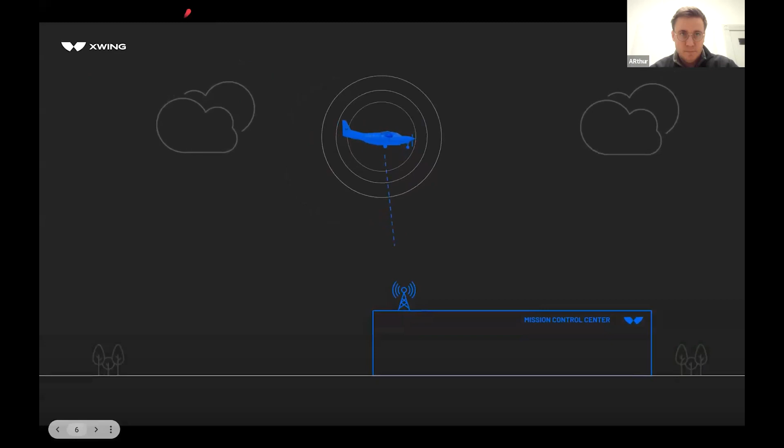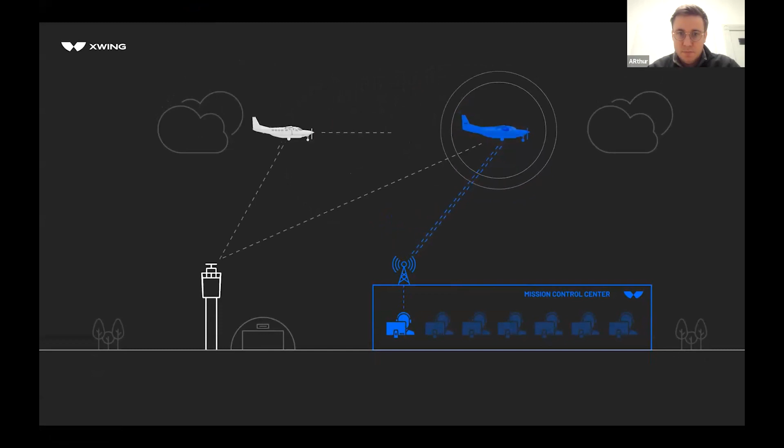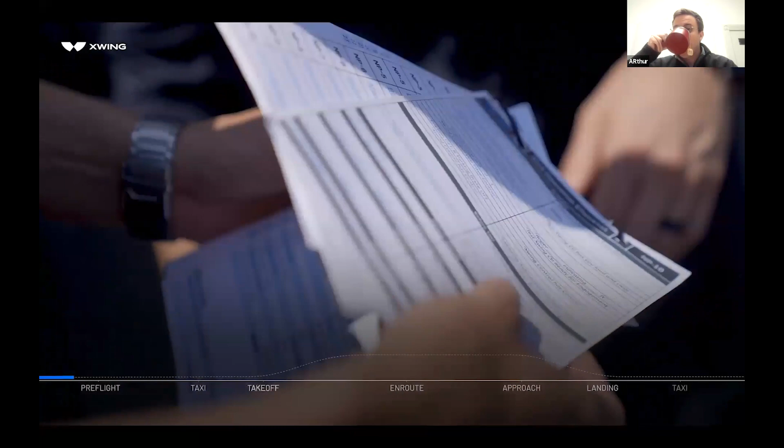Introducing Superpilot, Xwing's autonomous flight system. Xwing's Superpilot system addresses every aspect of the pilot's role. From a mission control center, a remote operator continuously monitors the plane, providing operational control, coordination, and communication. Our uncrewed aircraft seamlessly integrates into the national airspace system. Let's take a closer look at how Superpilot works from gate to gate. Before a flight, the remote operator validates an auto-generated, path-optimized flight plan and submits it to air traffic control for approval. When deployed in commercial cargo service, the same procedures required for a typical crewed Part 135 cargo aircraft are followed and supplemented with additional steps needed to support unique aspects of an uncrewed mission.

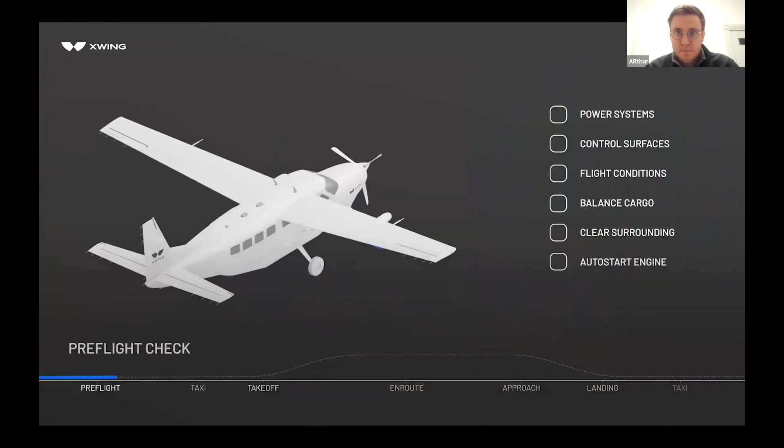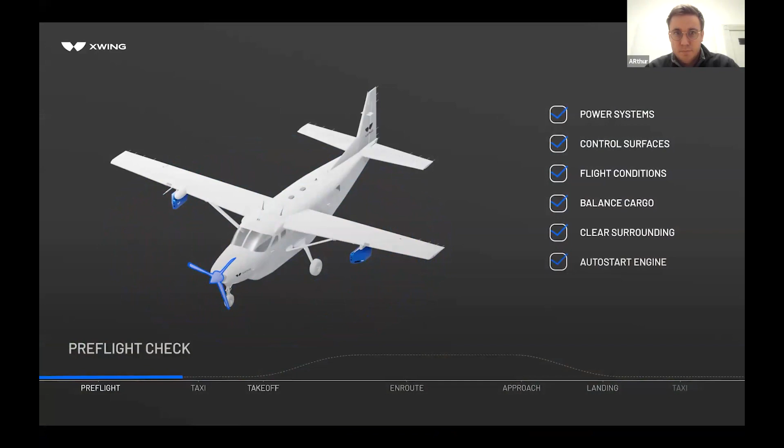Prior to flight, the ground crew inspects the aircraft, initiates the Superpilot system, and loads the cargo. Automated pre-flight checks initiated. Superpilot conducts an automated pre-flight inspection to ensure all systems are functioning properly. The remote operator reviews the weather and obtains clearances from air traffic control. After loading, Superpilot validates weight and balance data. The ground crew secures the aircraft and clears its surroundings. Then the remote operator initiates an autonomous engine start. Once air traffic control provides a taxi route, the remote operator confirms all systems are go and initiates the auto taxi sequence. The aircraft automatically stops at key points along the taxi route, and the remote operator coordinates with ATC before proceeding to the next taxi phase.

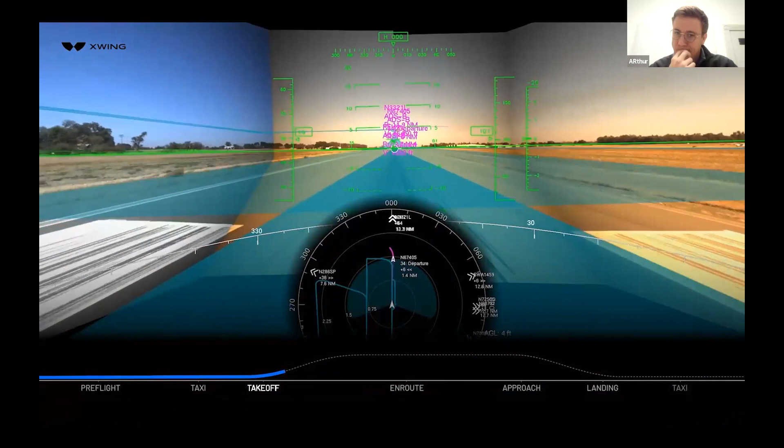Using onboard sensor data, detection algorithms run constantly to allow Superpilot to avoid any potential obstacles. While taxiing, the remote operator listens to ATC instructions and may alter the route as instructed. When cleared by ATC, the remote operator authorizes Superpilot to enter the runway for takeoff. Auto takeoff initiated. Superpilot, under the supervision of the remote operator, monitors system health and performance and its surroundings to ensure a safe departure. Superpilot then executes a takeoff and climb out automatically. While in the air, Superpilot maintains an optimal flight path based on the uplinked mission plan.

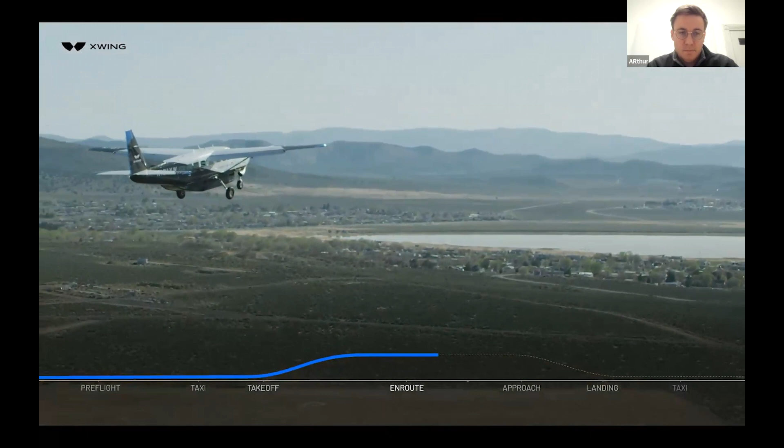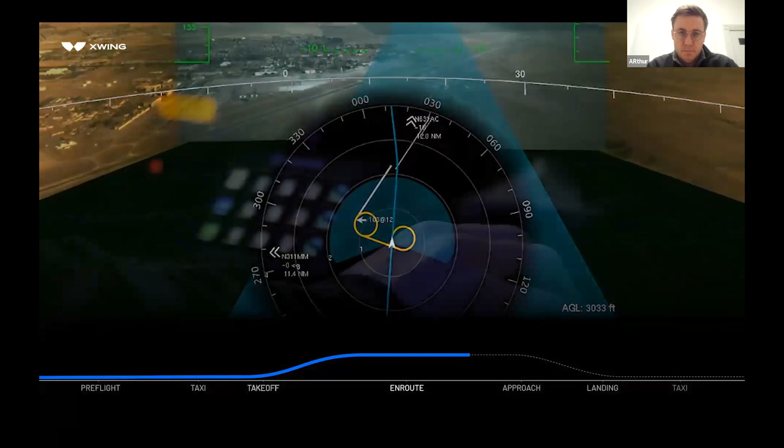Superpilot continuously monitors onboard system health and, if needed, can automatically conduct all the emergency procedures that a human pilot would normally follow. For example, Superpilot continuously monitors and evaluates the glide path from its location to the most optimal landing site from all suitable options. In the case of an emergency, Superpilot will initiate a reroute to this landing site. The remote operator may redirect the aircraft to a different landing site if desired and may communicate with ATC as needed. The Superpilot system also includes an advanced detect and avoid system. By fusing data from multiple sensors, the detect and avoid system monitors other airborne traffic in order to maintain a safe separation. Superpilot has sensors that can see in the dark, in weather, and in sun glare, thereby enhancing flight safety. Traffic conflict anticipated. Superpilot is also capable of autonomously executing an avoidance maneuver.

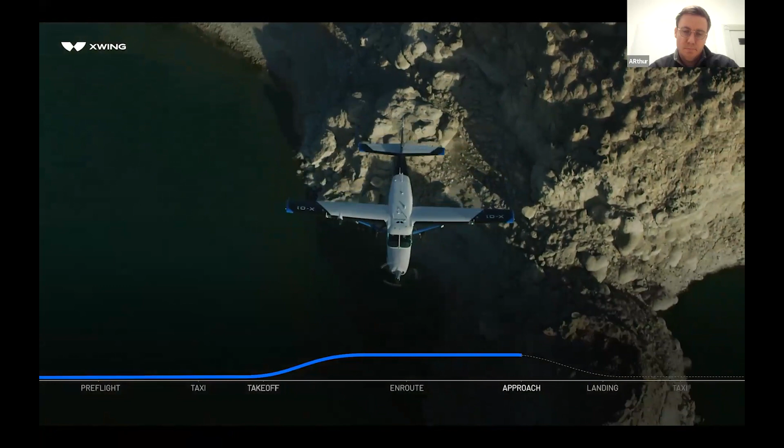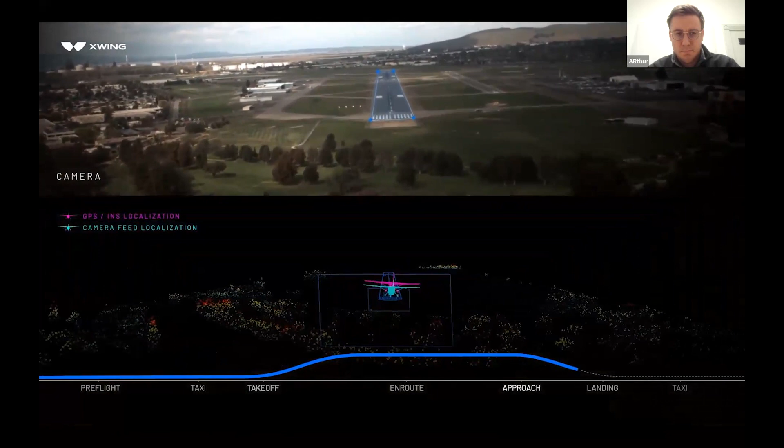Superpilot is able to detect any potential hazards with plenty of time for the remote operator to coordinate an appropriate response with ATC. When the plane begins its destination arrival sequence, Superpilot performs a number of self-checks before landing to ensure that all systems are operational. The remote operator communicates with ATC and receives instructions. Approach procedure updates may be transmitted by the remote operator to modify Superpilot's auto-land sequence. Superpilot maintains the runway centerline using conventional ground and space-based aviation navigational aids. As the aircraft approaches the runway, Superpilot engages onboard visual navigation sensors to identify the runway and continuously evaluate its ability to complete a successful landing.

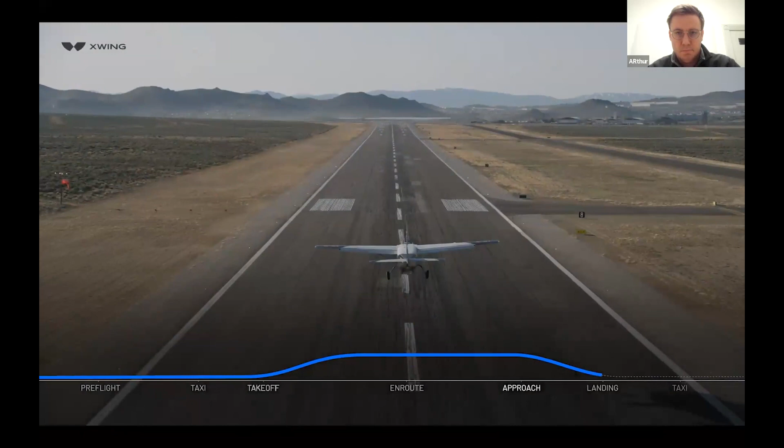Until completion of the landing, Superpilot uses onboard sensors to continuously verify that the runway is free of other aircraft and obstacles and guides the aircraft to touchdown. Just like at takeoff, Superpilot executes the landing and any emergency procedures on its own. After taxiing to its apron, Superpilot shuts the engine down and the ground crew offloads the cargo.

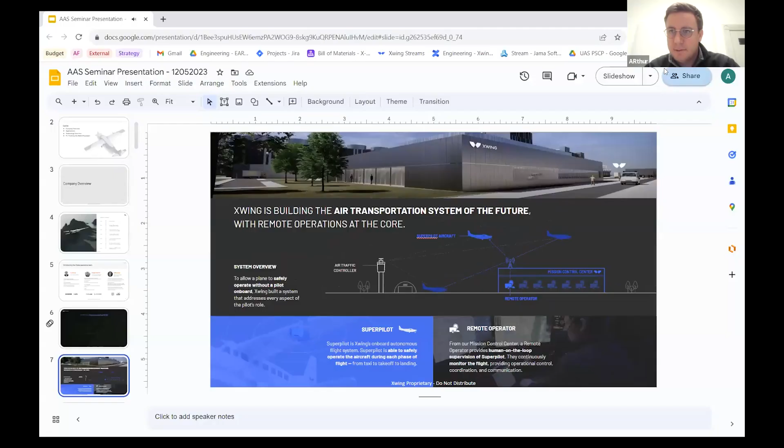Good. Okay, so hopefully that gives people a good overview of what the system does and how it works. I think the general premise of it at a high level is that we're taking the onboard pilot and we're moving them to the ground, and they're becoming a remote operator as shown here. The other consequence is that the remote operator no longer has the ability to actually directly fly the aircraft.

They are able to set the direction for the flights and give kind of high-level commands to the aircraft, but the workload on the pilot is greatly reduced. And because of that, it's very believable to think that one remote operator can now oversee multiple aircraft. The other piece is that in the case where the remote operator is incapacitated for whatever reason, or in the case where the communications link between the aircraft and the ground is inoperative for a while, the aircraft is fully capable of getting itself onto the ground.

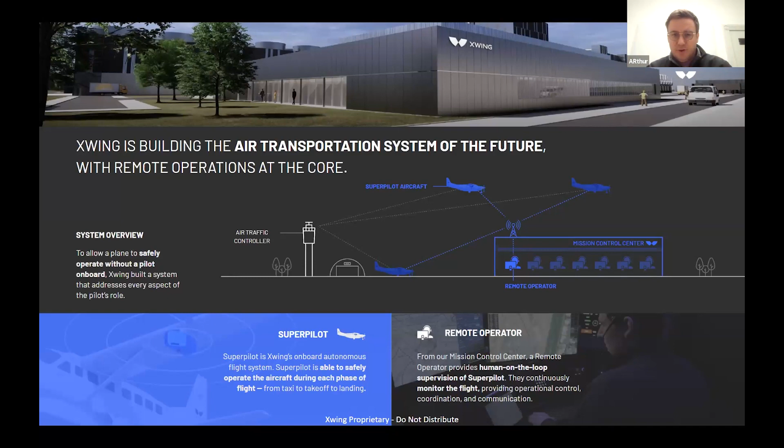But you can imagine now a world in which you have a centralized mission control center where a group of remote pilots oversee a group of autonomous aircraft. And they don't all have to be the same type of aircraft. The same person could oversee a Caravan, an eVTOL aircraft, or another type of vehicle even. And so we're really thinking about our technology as the kind of foundation of a different kind of transportation system that we'll be using in the future.

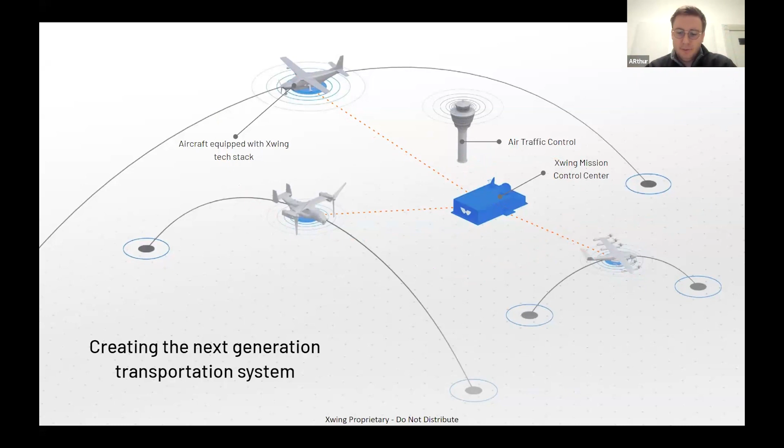Talking a bit about applications, I'm going to spend a tiny bit of time on this. I think at a high level, our technology offers a few advantages. So one is pilot shortage. You guys might know that there's a big problem with pilot shortage in the US, and that's not going to get any better as aviation scales with these new urban air mobility vehicles. These cargo operations of the type that we're flying are the least interesting type of flying for pilots. If you're flying a 787 with a major airline, that's a really cool job. But if you're flying cargo from a small airport to small airports, there's not a lot of pilots who want these jobs. And so there's an even more acute pilot shortage problem there.

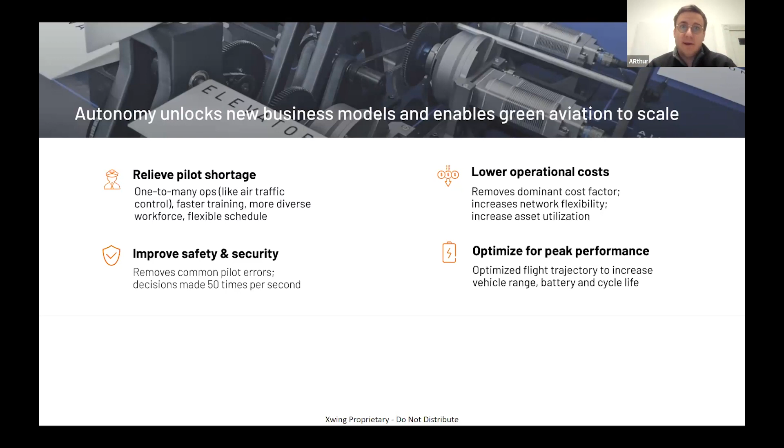The other piece is safety and security. I think a lot of small aircraft accidents come due to pilot errors, and we feel like a system is going to be able to improve on that. Lower operational costs, we'll talk about that in a minute, but effectively you are spreading the pilot across more aircraft, and so the cost is diluted, and the pilot cost in the whole equation really comes down. And then optimization for peak performance, while you're no longer carrying the weight of the human, so you can only carry cargo and really maximize the use of your payload.

Going forward, we're working right now on certifying our technology on a Cessna Caravan. And the clear application is working with cargo operators. So we have an airline that's got about 35 aircraft. FedEx has a much larger one. We work with UPS. There's a lot of these small airlines out in the country flying Caravans, and so that's the first application for us. There are military applications also, mostly in the cargo space. And then there is the advanced air mobility field, which is this up-and-coming new application that we'll talk about just a little bit here. The same technology applies across all these different types of operations and platforms with very little changes, it turns out.

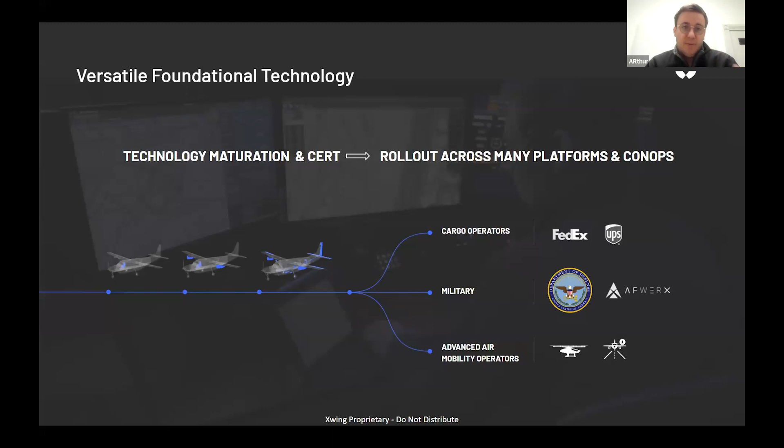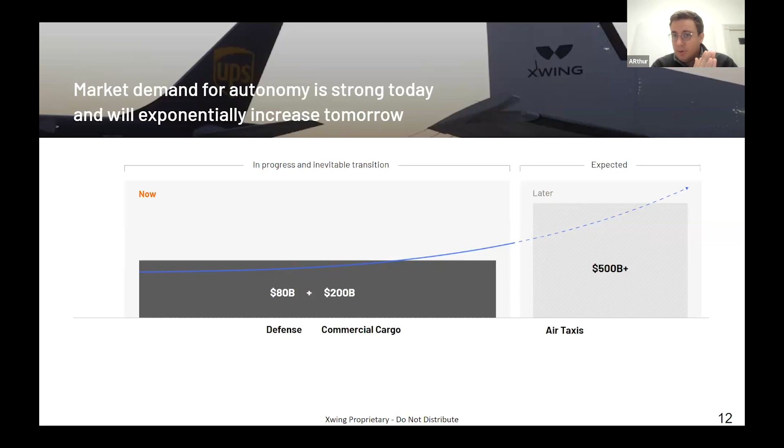Going one level deeper, our thesis is that there's this inevitable transition of cargo, both across commercial and defense, towards autonomy, where there's few reasons why in 10 years or so the majority of cargo aircraft wouldn't be autonomous, specifically the small aircraft. That in itself is already multiple hundreds of billions of dollars. And then beyond that, there is an even bigger potential for air taxis and air mobility in general, which is sort of an unknown at this point. So we're thinking about it, but there's still certainly a lot of questions around how that's going to turn out.

I'll talk briefly on the cargo piece. The way that small aircraft cargo works today, just to give you a sense, is you have a pilot, and they're going to take off in the morning at 7 or whatever. They're going to fly 1 hour. Then they're going to have to wait all day on the clock for cargo to be loaded back into the aircraft. So you have to pay them for a full day of work for what is effectively something like 2 hours of flight a day.

So it's pretty inefficient from the usage of the pilots. And so the premise of autonomy is now the pilot sits in a room, they can pick up a flight from 7 to 8, another one from 8 to 9, 9 to 10, and basically fill their day with actually flying time. And therefore you can dramatically increase the use of the pilot, and that makes your ability to generate margin much higher in a space where margin is really, really tight to begin with. So that's the cargo commercialization potential.

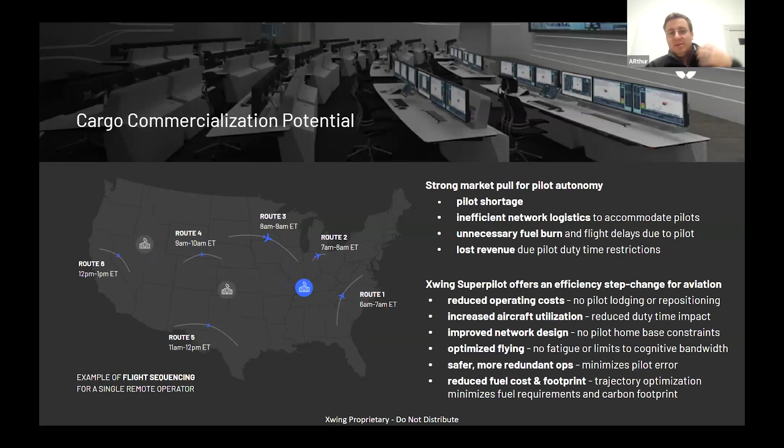And then beyond that, on the advanced air mobility side, there's folks talking about this $1 trillion opportunity. And the way that I've always thought about this is, I think the opportunity is actually medium until you get autonomy. And I think the only way to get to the $1 trillion market is with autonomy. The reason is fairly simple in that, if you have a 4-seater vehicle that has a pilot, first off, you have to pay the pilot. The vehicle costs more because it's a bigger vehicle. And the odds that you're going to fill the 4 seats each time are actually pretty low in a dense network.

And so what it also works out to is that you end up with a price point of $4 to $6 per seat mile. And that makes it really difficult to generate revenue because that's 3 to 4 times the cost of an Uber. So you're not going to scale to a $1 trillion market if you charge 3 or 4 times the cost of an Uber, because people simply won't be able to afford it.

The counterpoint to that is if you have autonomy, then you can build a smaller vehicle that's 1 seat that is cheaper because it's smaller, and you always fill it because it's only just 1 seat in there, so it's always on demand. And so once you work all that into a unit economics model, you can get down to the $1 to $2 per seat mile, which is the cost of an Uber. That's actually an affordable solution. And so to me, that's the key unlock to getting to the scale in urban air mobility. And until we have certified autonomy, we're just not going to get to these larger opportunities.

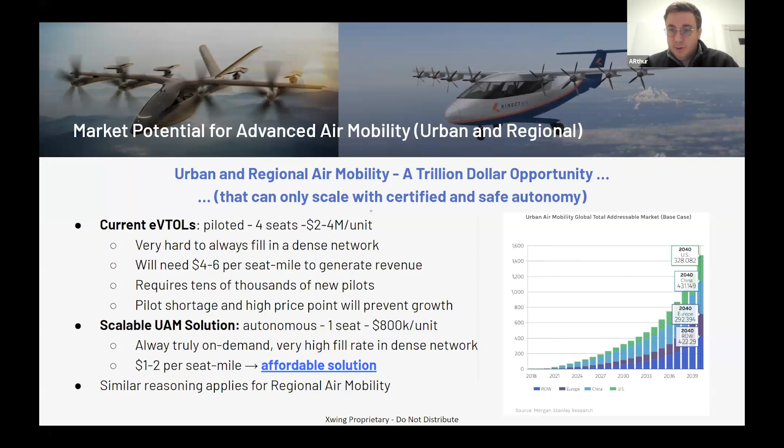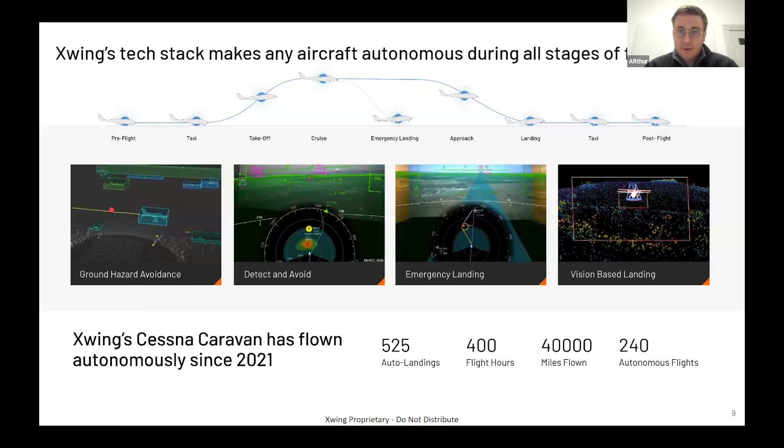All right, so let's talk a bit about the technology and kind of what's under the hood. So the way that our system works is that it's very aircraft agnostic in that the technology stack can be, to a large extent, applied to any aircraft, and it can make it autonomous during all stages of flight. So that includes the normal flights, so taxi, takeoff, cruise, and so on, but also emergencies, like if you have a fire in the cabin, if you have a loss of engine, if there's ice on the wing, the system is capable of dealing with these types of contingencies.

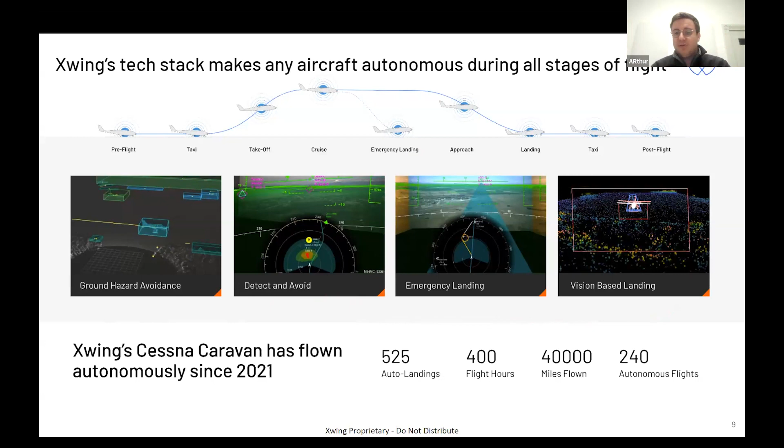And then we'll talk about it a little more, but there's a variety of key systems that are sort of new compared to what's done currently in aviation. So you have hazard avoidance systems, you have a detect and avoid system, systems that deal with emergency landing, systems that deal with vision, using cameras to figure out the position of the aircraft and get it to the ground. And so these systems have sort of matured over several years since 2021. And what we've done in our certification program is basically take the maturation of that system and re-architected it into a certifiable solution. And this is what we're currently certifying with the FAA today.

To give you a sense for what are the key pieces here, I'm not going to spend a ton of time necessarily here, but I wanted to give folks just situational awareness. So the core components of the Xwing autonomy stack are basically these boxes here. So at the center, you have your mission management system. That's the brain of the vehicle. It's basically getting inputs from all the other systems, and it's making decisions about what to do, and it's generating flight plans if it has to.

So it knows there is an aircraft coming our way, and it has to avoid that aircraft, and so it's going to generate an alternate flight plan autonomously. So again, central brain here in purple. To the right of that, we have the autoflight system. That's actually the system flying, moving the controls and all that, and actually doing all the low-level flight, basically.

Underneath, vehicle management system. So that system deals with keeping the lights on, looking at the health of the vehicle. Is there something wrong with the engine? Is there a fire on board? And so on and so forth. And so it's constantly communicating with its boss, the mission management system, to let it know if something is going wrong with the vehicle.

Yellow is the hazard avoidance system. So that piece is about looking around the aircraft and trying to detect anything that's coming our way so that we can make appropriate decisions. And then the last onboard system is the communication management system, which deals with receiving data from the ground. And then on top of that, we have a set of off-board systems, which are the ground control station with the remote operator, and then the communication system, which sends data from the ground into the aircraft.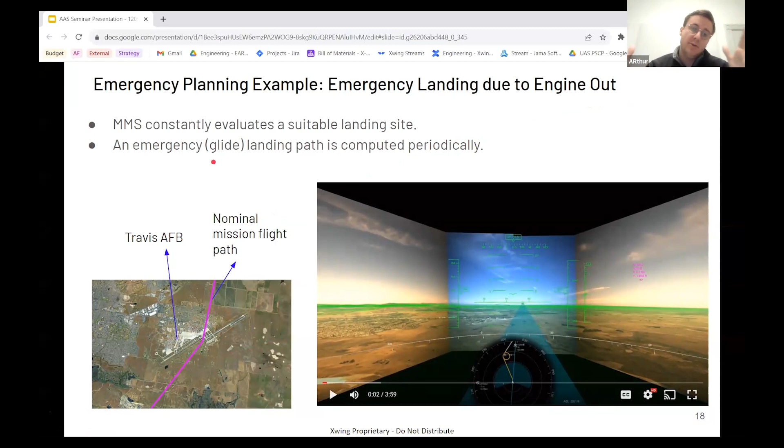So right here, it's actually switched path from one runway to another, and it's constantly carrying out that optimization calculation, trying to get to the next airport. That's just one example, but it's doing that for engine failures, for icing, for all sorts of contingencies in parallel. And from there, you can tell that a human would never be capable of doing that, but this is where computer systems are truly helpful in bringing the next level of safety, constantly being on the lookout for anything that might go wrong with a plan on how to address it.

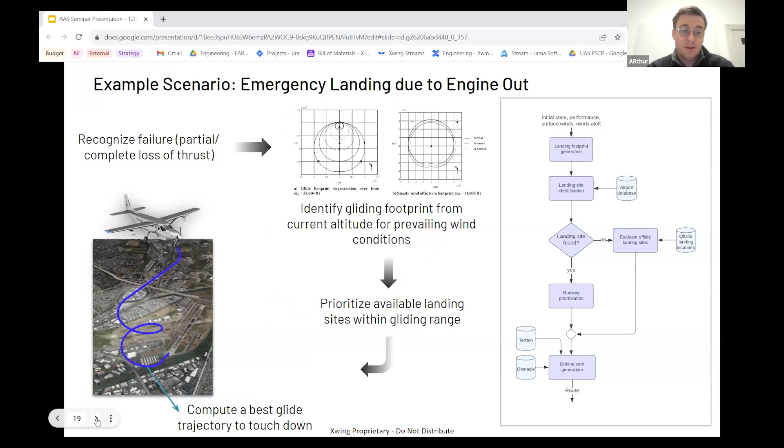And this is just a little bit the details of how it works, but it's really about looking at winds, looking at the characteristics of the aircraft, and how to properly get to the ground safely. Another example is detect and avoid. So basically, this is a system that looks around us and looks at an aircraft coming our way. And so I'm going to play one of the videos here.

So what's going on here is that we have an aircraft coming at us. So you can see the N-84 VC. That's what you see in the background there on the camera. And so the system is automatically flagging that for us. And down here in the compass, what you're going to see in a second is this yellow arrow that's going to enter the field of view. And you're seeing these circles there, these ellipses. What this is actually showing is if we were to continue forward, this is when we're going to get pretty close to that other aircraft.

And so what the system is going to do is, as we enter the orange ellipse here, it's going to initiate an avoidance maneuver for us, because that system has automatically detected that there was a danger. And it's able to detect obstacles and automatically avoid them in case the human hasn't done anything. So right here, we've initiated an avoidance maneuver to avoid this other traffic, and then we are going to an alternate path. I should clarify that all of this is actual flight test. This is not synthetic data. This is actual stuff that we test day in, day out at our facility.

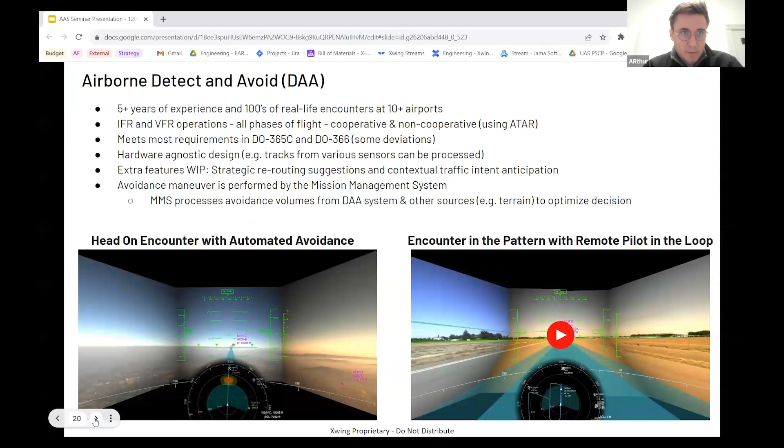I'll move on here to the next one, if it will let me. Come on, there we go.

So another piece of the system is visual navigation. So the way this works is when you come in to land, you always have a GPS, and GPSs are pretty good, but in order to truly get safely onto the ground, you need an additional type of navigation system. And so the way we do this is we have cameras on the aircraft, and the cameras will have the runway in the field of view, and then we have a machine learning algorithm that detects the runway position and back calculates the position of the aircraft with respect to the runway using the image.

And so in practice, the way we work, and I'll show you the video here, is we have these two systems. We have the GPS on one side and the camera-based localization on the other. And they run in parallel, and they cross-check each other, and they augment each other. And what this is showing here is on the top, you're going to see the actual runway with the corner points that have been identified by the machine learning algorithm. At the bottom, you are going to see the calculated position based on GPS in purple and the calculated position based on just the camera in blue.

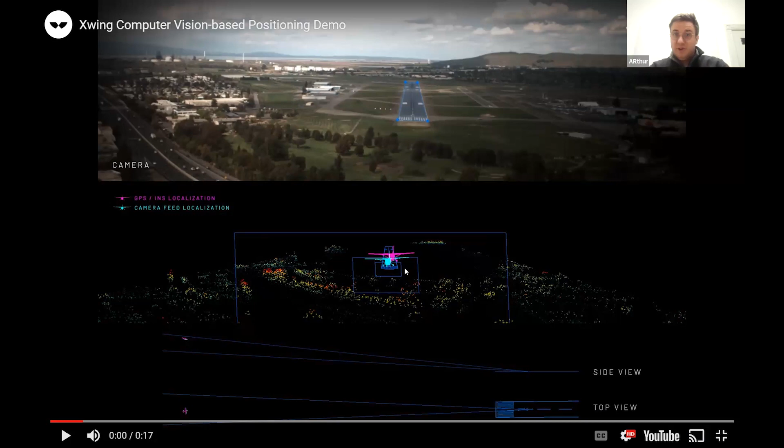What's interesting is as you're far from the runway, you're going to see the blue airplane jump a lot. And as we get closer and closer, you're going to see the blue airplane get a lot steadier. And actually, as you get above the runway, the accuracy of the camera-based solution becomes higher than the accuracy of the GPS. So these two solutions kind of complement each other at various stages of the approach to get you to a really high level of accuracy at any point. And so again, you see the blue jumping around, and as we get closer, it's going to become much, much, much steadier.

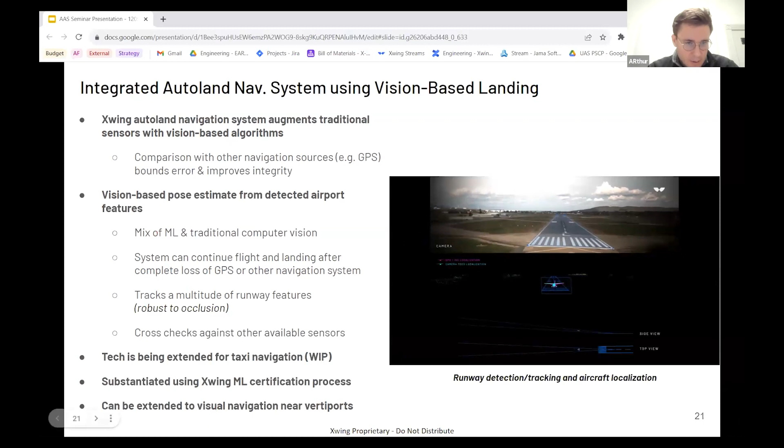All right, I'll talk briefly about a couple more applications, and then I want to talk a bit about the safety case here. So the ground hazard avoidance system is using LiDARs that are mounted under the wing of the aircraft, and it's not using any sort of machine learning, but what it's really doing is receiving data from the LiDAR and, using our algorithm, segmenting the ground out, clustering objects, and tracking their state to make sure they're not going to collide with the vehicle. And so that system is key for us to navigate, but we only really use it on the ground.

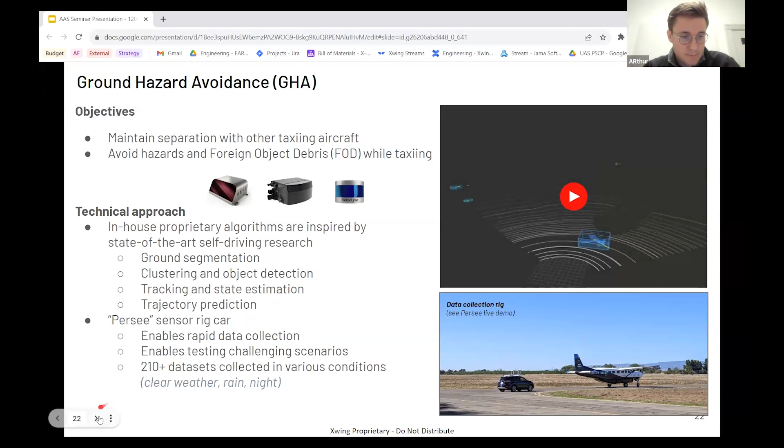All right. And then I think the last piece of the system that I wanted to mention is the pre-takeoff and pre-landing runway checks. For people who follow aviation incidents, there's been a number of cases of near misses on runways recently. And so a system like this can be used for autonomous aircraft, but also piloted aircraft. What you can do is, coming into the runway, there's a camera that's looking at the runway and detecting vehicles, people, aircraft, and so on and so forth. And so that piece is key to make sure that we never come in and land on top of another aircraft, as you can imagine.

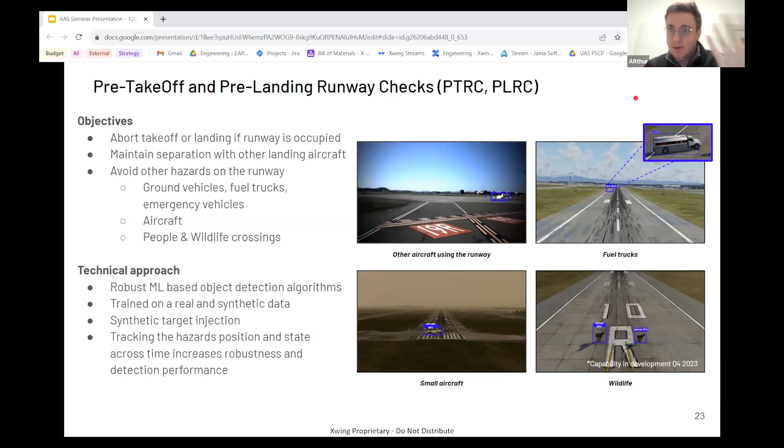Okay, so the last topic I wanted to cover today is I want to talk a bit about aviation and safety and what it means to introduce something as new as autonomy in this existing aviation safety paradigm. So one of the things I like to do sometimes is just think about how incredibly safe and advanced aviation is today compared to the early days. I think everybody here has flown on a commercial aircraft probably, and you don't even think twice about it. And I think that's just incredible.

And we should pause to think about that, because you're flying in this basically thin can. It's a pressurized can with millimeter-thin walls. You're flying at 500 miles an hour, and there's this massive turbine right next to you that's spinning at tens of thousands of RPM. And there's this super high temperature controlled explosion that's happening at the center of it. And it never fails. I mean, literally, it only fails once in a billion flight hours. This is just incredible, right?

Now let's think about how we got there. First off, I think that if these airplanes didn't exist today and you tried to design them from scratch, people would think you're crazy because it just sounds so incredibly complex. But it is safe and it works. And looking back, the way it got to that level of safety is basically through a giant trial and error experiment.

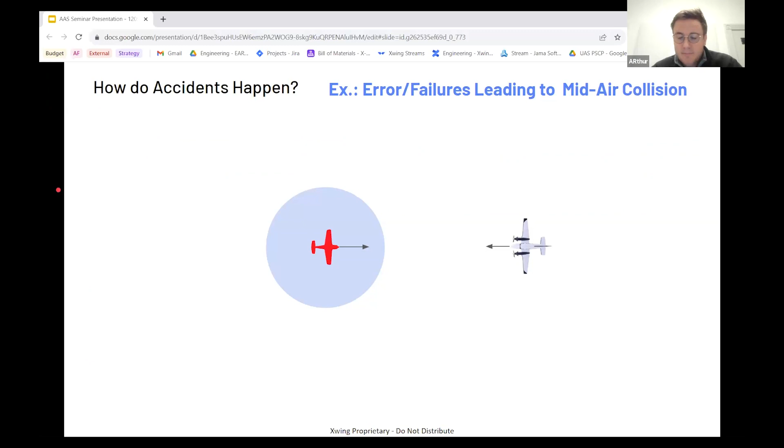So looking back, let's just look at an accident. What is it going to take for two aircraft to collide in the air? To simplify it, let's just say that four things happen. First off, if these two aircraft run into one another, there's a system that didn't do its job. They probably should have been detected sooner. So something went wrong on the system side. There's probably something wrong on the operations side because these aircraft shouldn't even be on a collision course to begin with. So that's another thing that went wrong.

The pilots on board didn't see each other, so both pilots hadn't noticed each other, and so there was something wrong with the pilot. There was an issue, a failure probably on their end. And then just bad luck. Aircraft are pretty small in the grand scheme of things, and so the odds of them actually physically running into one another aren't that big.

So if we think about the protection layers that have failed for there to be a mid-air collision: there's an aircraft system layer that's failed, there's an operational procedures layer that's failed, there's a pilot that's failed, and then there's just the luck factor that's failed us.

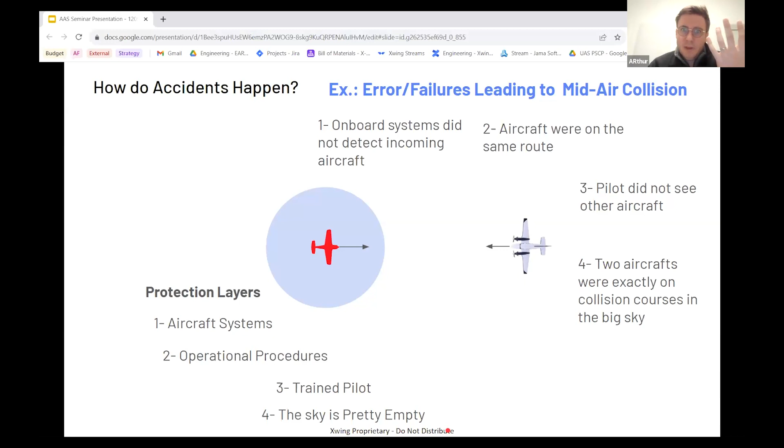And so the way a lot of aviation people think about that is what they call the Swiss cheese model. There are various layers of protection, various barriers to incidents. One of them is what's on the aircraft. The others are the operational procedures, the training of the pilot, and just the fact that the sky is pretty empty in the grand scheme of things. So for there to be an accident, there needs to be a gap in each of these slices of cheese in the exact wrong way, such that there's actually a collision. So that was an example to introduce the concept of the Swiss cheese model.

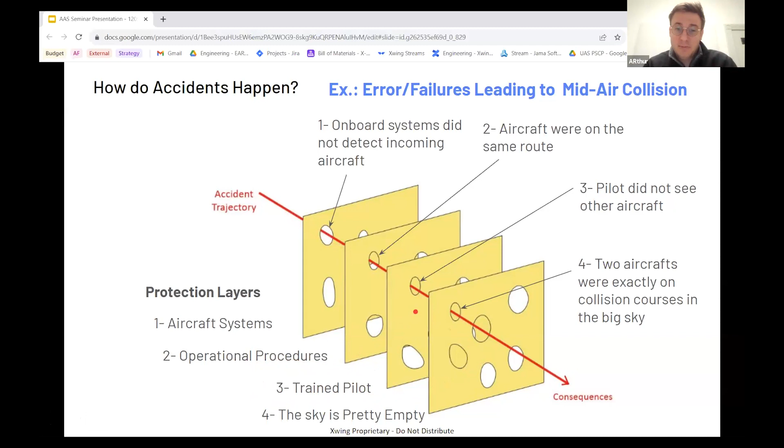And now we're talking about autonomy. So we're going to talk a bit about what it is like to actually remove the layer that's the trained pilot, and what it does to the other layers once we do that.

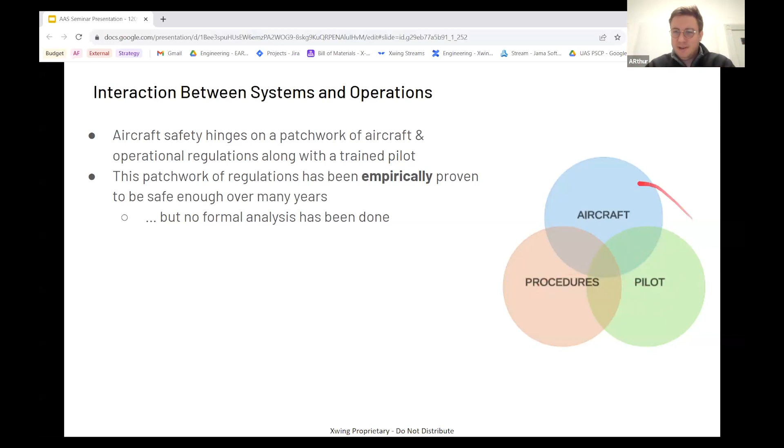At a broad level, aircraft safety hinges on this organic patchwork of operational regulations, so that's the procedures here, aircraft regulations, and then the training and the awareness of the pilot. And like we said, this has not been well thought out from the get-go. It just sort of converged to that. There hasn't been a formal analysis to get to what the regulations in each of these areas are that lead to safe enough operations.

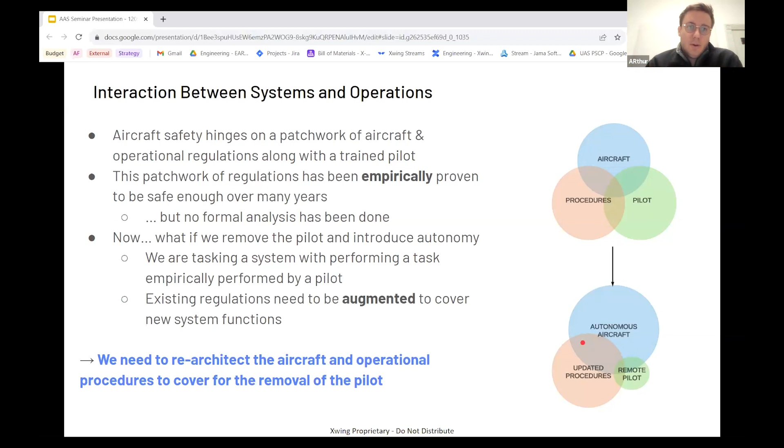So now we're talking about this new paradigm where we've effectively reduced the role of the pilot. It's now a remote pilot. We've increased the role of the aircraft. It's now an autonomous aircraft. And we need new procedures to operate the whole thing. So we're going to need to think about re-architecting the regulations for the aircraft, the requirements for the aircraft, and the requirements for the procedures to cover for the removal of the pilots. So let's talk about an example here that's hopefully going to put this in context.

There's a regulation that's part of the operational regulations, 91.113. And what it basically says is that the people flying an aircraft should maintain vigilance.

To look for other aircraft that may be coming their way. And that's a very qualitative term. I mean, vigilance is not something you can really quantify. But empirically, if you had a licensed pilot on board an aircraft, that was kind of sufficient to meet the intent of that 91.113 rule.

Now, you can see that that's not really designed for systems. If you want to put a system in there that's performing that same task, how good does it have to be? How good is maintaining vigilance? So how good do you have to be at detecting these aircraft around you? And you could think, well, I have to be just as good as a human, so I might need to go and quantify how good humans are at this.

It turns out that it's actually incredibly difficult to do it that way. And so you don't even really want to approach the problem that way. The way that Xwing is thinking about it is, okay, let's think operationally. How good do we have to be? What is the acceptable rate of collision during operations today? This is just looking at empirical data. How often do planes run into one another? It's very rare. But at least it gives us a number to start with.

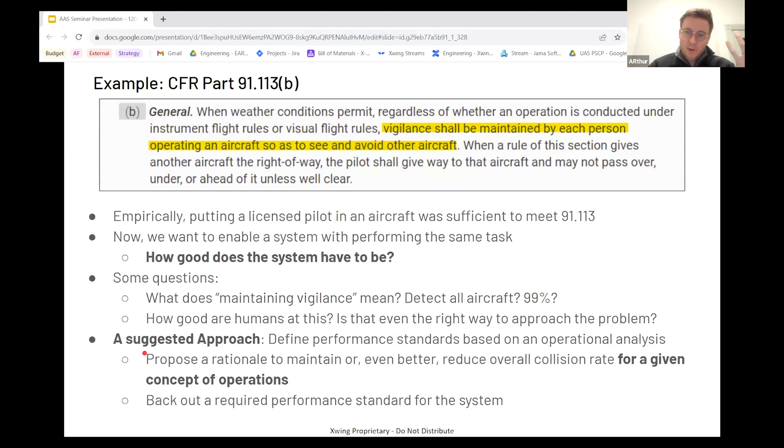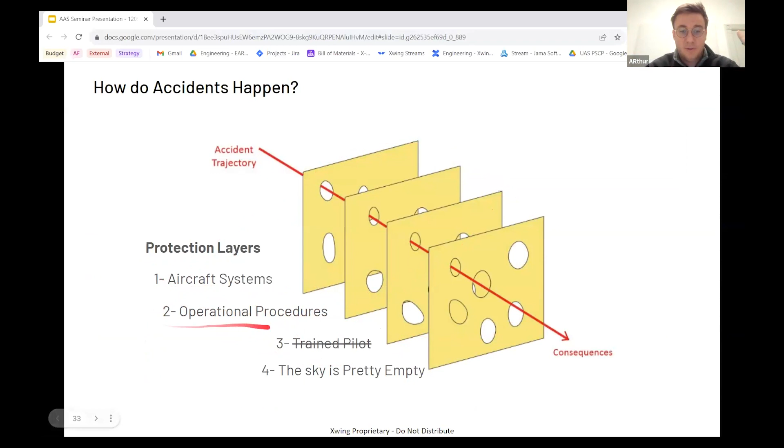From that operational number, we can say that at the operational level, this is the type of performance we would like to reach. Now, like we said before, the overall operational performance is a combination of all these various slices of cheese. And now we no longer have the pilot. So we've got to think about, in order to get to that overall rate of accident, what percentage of that do we assign to the aircraft system? What percentage do we assign to operational procedures, and so on and so forth?

The way that we have approached it is a series of analyses. On one end, we're performing analysis on the system side. On the other, we're performing analysis on the operational side. And we're going back and forth between the two. We're saying, maybe the aircraft covers so much of the requirement, and maybe the operational procedures and mitigations in place will cover so much. And we go back and forth until we find an equilibrium that the system can meet, that's going to overall get us to a level of safety that is acceptable at the operational level.

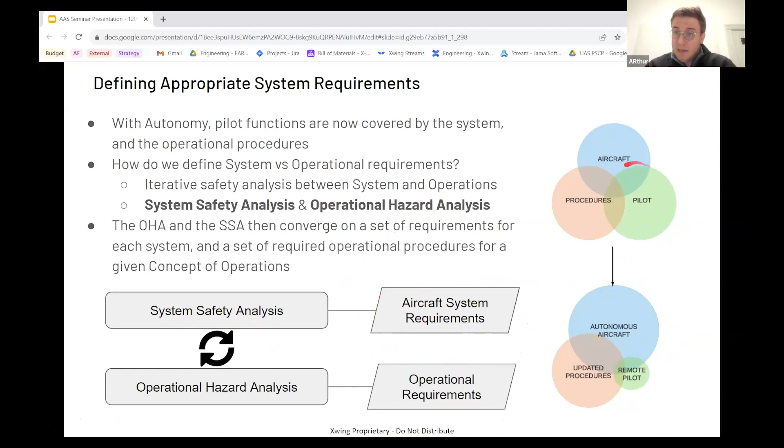So there's this back and forth analysis between the two that leads to two sets of requirements: aircraft system requirements and a set of operational requirements. And that is how we go about defining how good a system has to be in this new construct where the pilot is no longer as big a part of the safety case as it used to be.